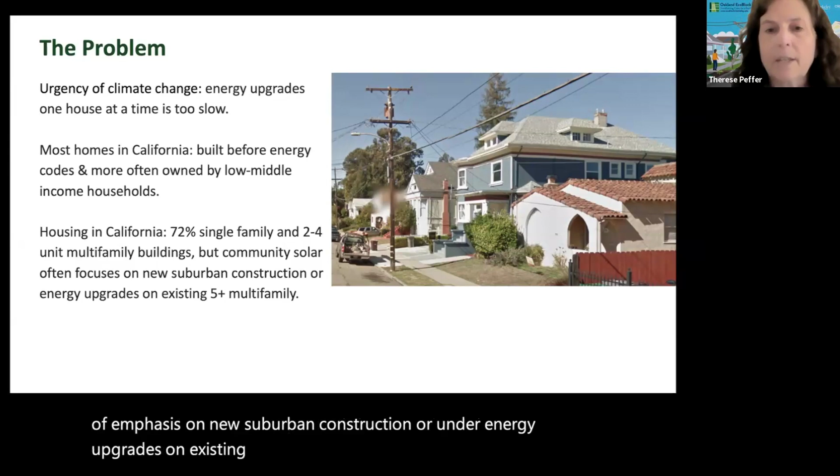Housing in California is predominantly single family and 2 to 4 unit. But at least when we were trying to look for precedents for our project, we saw a lot of emphasis on new suburban construction or energy upgrades on existing multifamily. And so here we felt like, well, this is kind of a sweet spot, really, in a place where we need to focus is existing urban single family homes or low density multifamily.

So the goal was to provide affordable access to solar and energy upgrades, reduce greenhouse gases, improve the electric grid reliability, and to scale, to figure out how we could get more of these happening.

Unique features: we're looking at retrofits of older 1 to 4 unit housing stock, shared rooftop solar, and a potential for EV car share and shared curbside EV charger. That's still not finalized, but I'll talk about that. We designed a microgrid, and I'll talk about our process for that, but we chose not to build it, and I can get into the details of that. We were able to do some stormwater mitigation on the block, and we helped the block create a nonprofit association to share the rooftop solar.

The initial project was funded by the California Energy Commission. We were one of 12 projects as part of the phase 1 feasibility study, where this was: what's your dream? What's the technical, social, economic, financial feasibility of doing some sort of advanced energy community? And we were one of 4 projects that was selected to actually implement our vision back in late 2019.

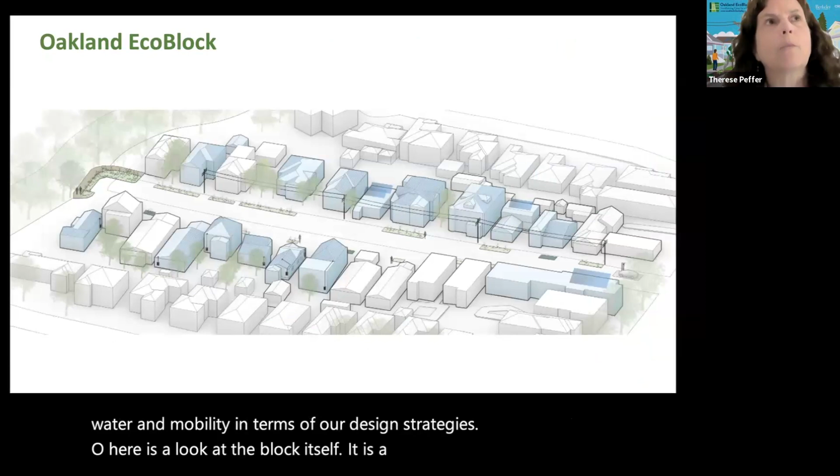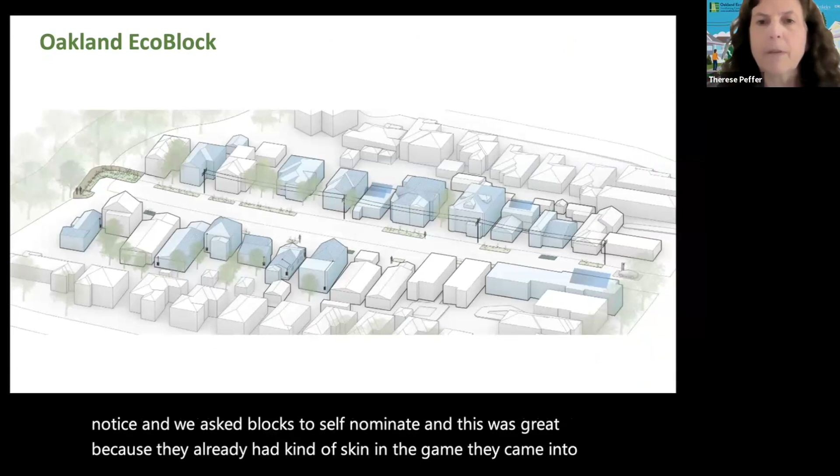One of the first things we did is that we released an opportunity notice, and we asked blocks to self-nominate. This was great because they already had kind of skin in the game. They came into the project at least somewhat organized. They had a leader, and then they were able to recruit folks from the block.

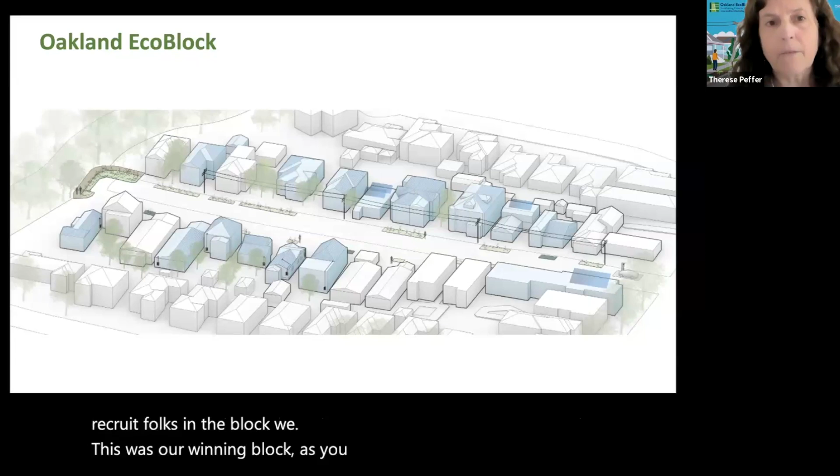This was our winning block, a schematic of the block that was selected through many conversations with the block leadership, with the other top blocks, and with the City of Oakland and PG&E to select this block.

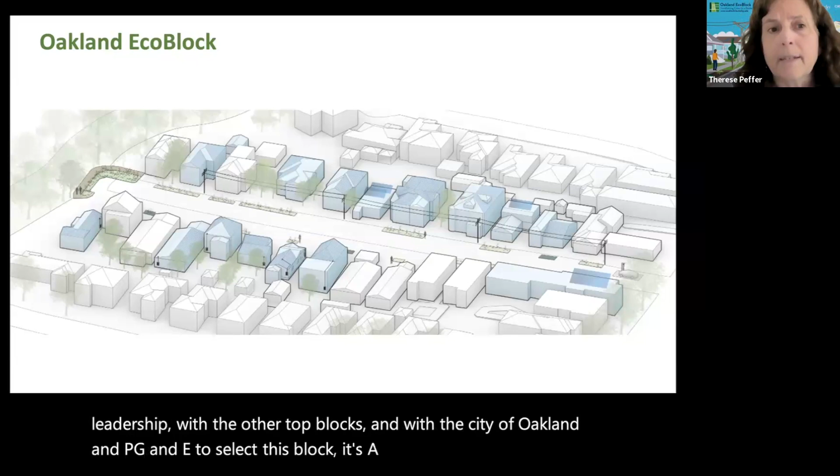It's a cul-de-sac, so it led to some interesting things about the creek at the end there and what we could do with the stormwater on the creek. You can see the houses in blue are the ones that are participating.

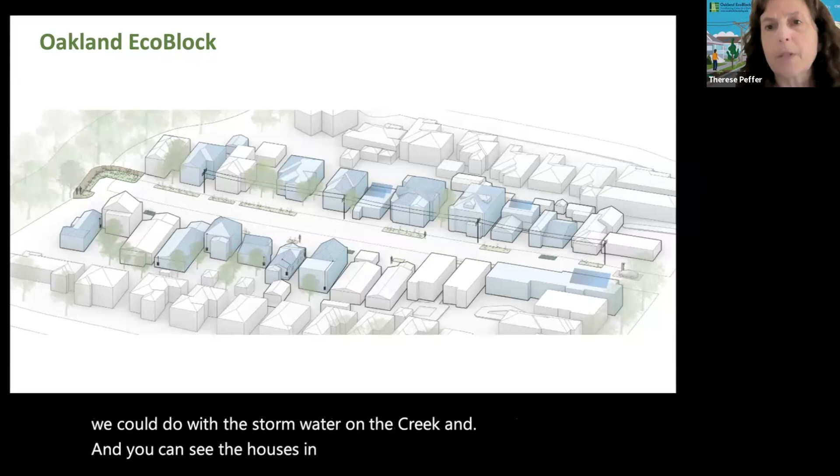Not everyone participated. So of the 24, 25 properties on the block, 15 properties were involved, and that's 25 units.

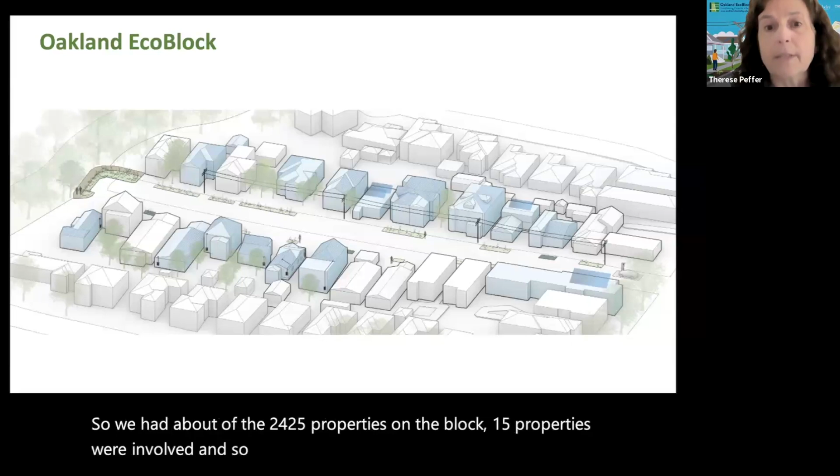Shared rooftop solar, stormwater bioretention, and sidewalk planting up and down the street. And then the innovative legal and governance structures to make this all happen. The idea again was to provide templates. We went through a lot of documents and design, and we want to share those so that it's easier for the next EcoBlock.

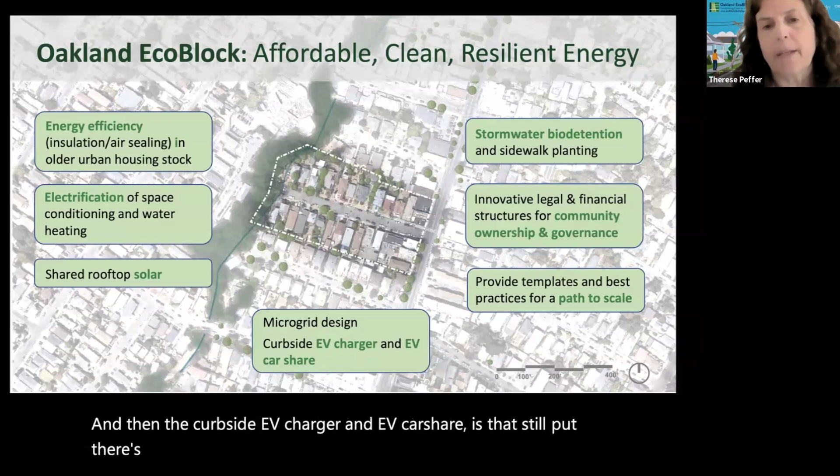We did design the microgrid, I'll talk about that a little bit more in a bit. And then the curbside EV charger and EV car share, there's potential for it, but we're still under a lot of conversations about that.

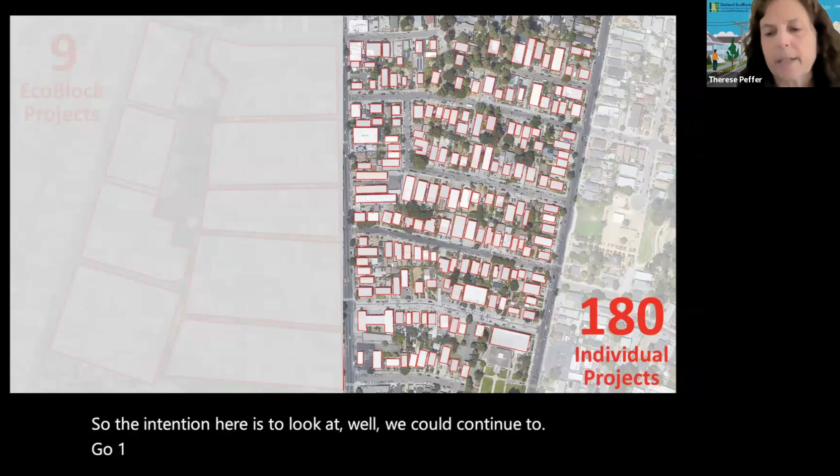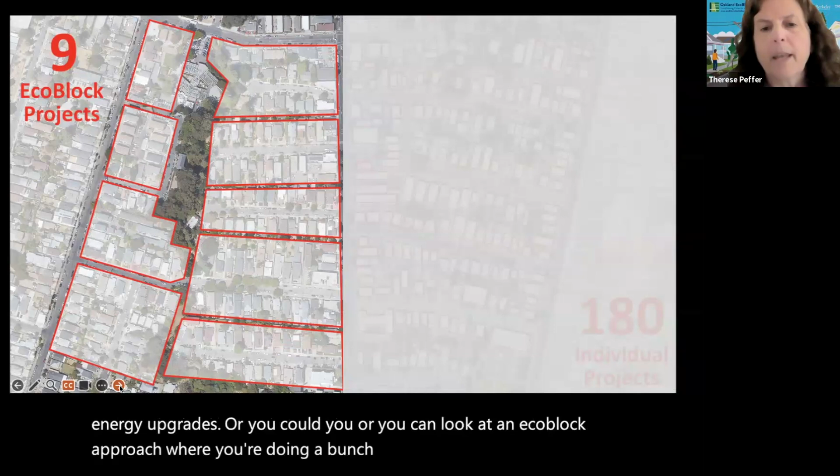So the intention here is to look at, well, we could continue to go one house at a time, one building at a time for electrification and energy upgrades. Or you could look at an EcoBlock approach where you're doing a bunch at a time. And so the intention here is to analyze the economies of scale. What economies of scale can we leverage here?

And clearly you can reduce capacity for solar and storage by sharing. Some people are gone for months, some people are up at night. So if you look at the load itself, there's potential for reducing the capacity of these systems by sharing. Reduce energy transmission losses when you're producing it right there.

Save construction time, I have the next slide talks a little bit more about that. When you can share a car and share an EV charger, then you have fewer vehicles, equipment.

Decommission natural gas lines - maybe you've heard of SB 1221 - a lot of cities have reached out to us saying, wow, how did you get so many people to buy in? And it wasn't 100%, but they're very interested in how you decommission natural gas lines, because anytime there's an earthquake in California, there's always that danger of these natural gas lines exploding, rupturing, causing fires and other safety and health issues. And then finally, this idea of rapidly increasing adopters through the neighbor peer effect.

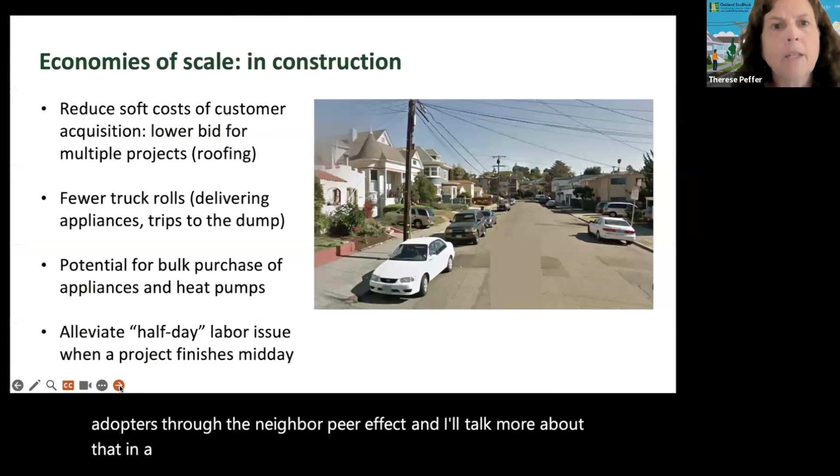I'll talk more about that in a minute. So in terms of economies of scale and construction, one thing that we've seen is reducing the soft costs of customer acquisition. We saw this actually in the project where we had to replace about half of the roofs in order to install solar. And it was much easier to get a lower bid when there were multiple projects involved.

And so we actually saw that achieved on this project. But you can imagine it might be similar for a solar contractor, or home performance contractor, electrification contractor, to be able to aggregate the customers and be able to reduce that soft cost. Fewer truck rolls, delivering appliances or trips to the dump. Potential for bulk purchases of appliance and heat pumps, and we saw that.

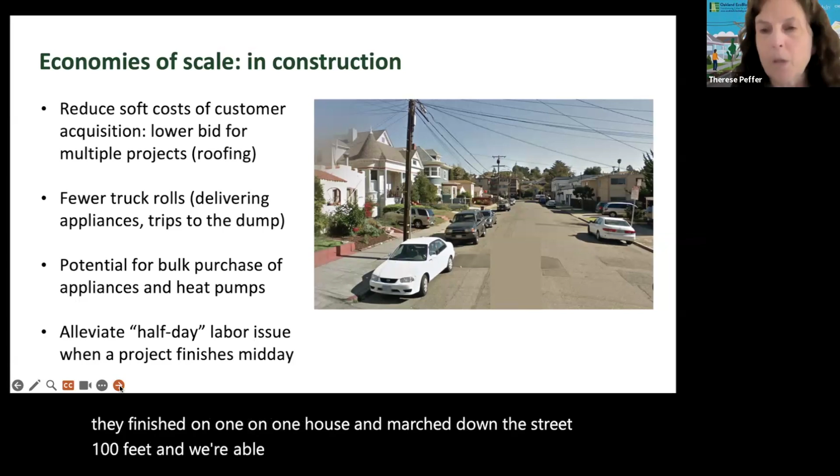A new idea that I had never heard of is alleviate the half-day labor issue. So when a project finishes midday and maybe the next project is 30 miles away, you might send your guys home. In this case, and it happened on this block, they finished on one house and marched down the street 100 feet and were able to bring their equipment over and set up to start the next day.

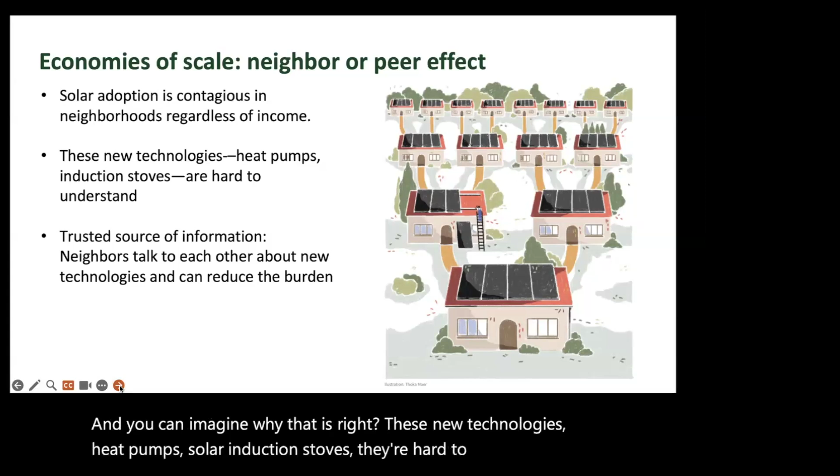These new technologies, heat pumps, solar, induction stoves, they're hard to understand. Whereas solar is very visible, so it's easier for the neighbor to see it and point up at your roof, we still think that this is an important source of information, a trusted source of information for neighbors to talk to each other about these new technologies and reduce the burden of adopting these things.

You can ask things like, how much did that cost? Did you like your contractor? What's the maintenance like? Things like that.

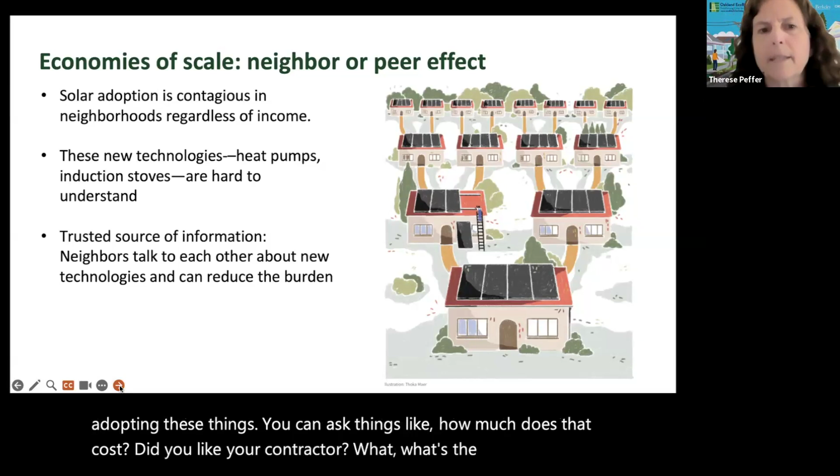So it really starts with the community. We lucked out, this was the community that reached out to us. There were 12 applicants, and this was the winner.

We wanted to really reach them where their concerns were. They want more comfortable homes, improved air quality, keep the lights on, lower the energy bills, local clean neighborhood transportation. So cleaning up the outside air, not just the inside air. And then really helping to strengthen the ties within the community, working together.

So one of the things we asked them to do was join and engage in a homeowners association for 5 years to co-own the solar. One of the things we're doing is testing the calculation of the solar credit with the fees to cover the operation, maintenance, and insurance for this association and for the block.

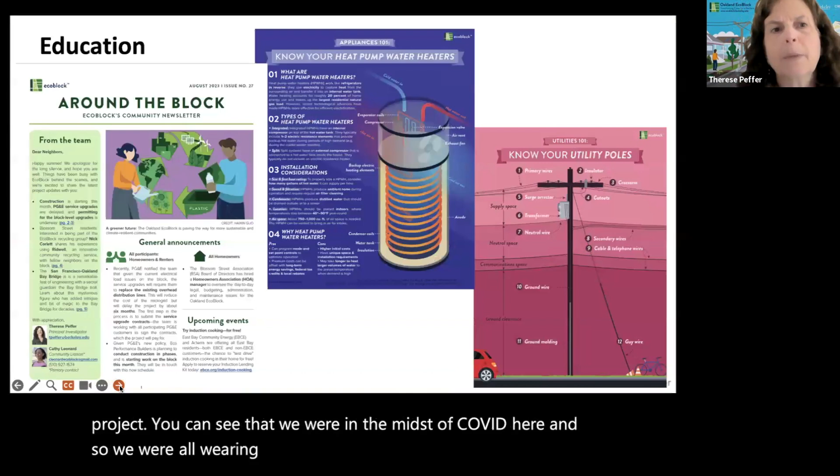I think we had about 10 different meetings on the block where we would go out and talk about different aspects of the project. You can see that we were in the midst of COVID here, so we were all wearing masks. We spent a bit of time creating what used to be a monthly newsletter, then it switched to quarterly, and now it's like twice a year or something. The idea was to really engage with people, to explain some of these concepts and technologies, and to let them get to know us a little bit better.

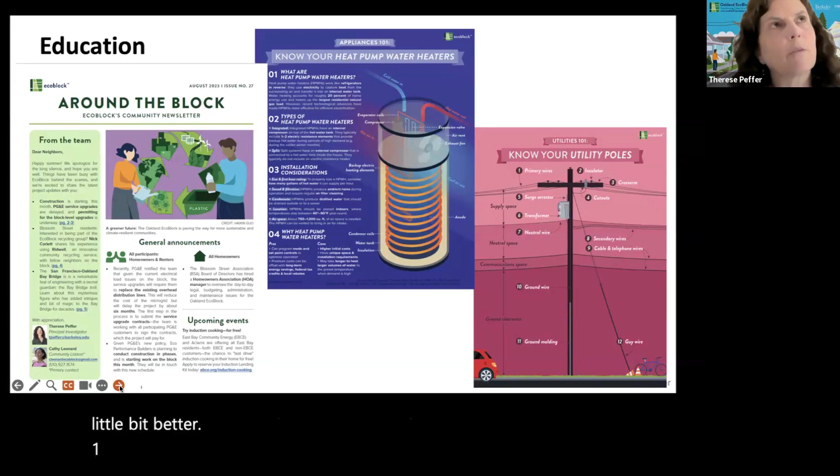One saying that I read or heard recently at a conference was that progress moves at the pace of trust. I think there's a lot of truth to that. It took us a lot of time to build that trust with the community.

So switching now to the microgrid, the idea here was to work with the utility to create a grid that can operate on its own if the power is out, with both a battery and distribution lines. In our case, we have rooftop solar, and we worked with the utility to use their overhead lines.

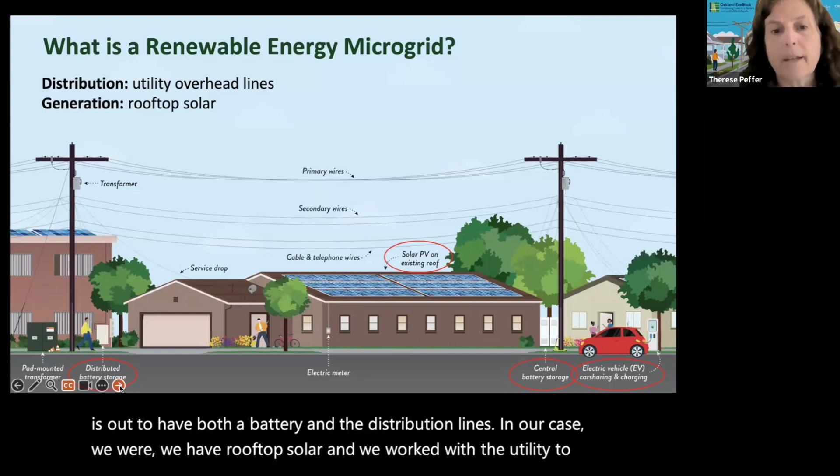Here's another image of that, showing if power goes out in Oakland, the switchgear would open, and this would be an islandable microgrid with solar, a central battery, and grid forming inverter. Not all houses need to participate, so technically their meter or switch would open and they would not benefit by the power. But here are some of the details of what we designed in terms of the size of the battery and 100 kilowatts of solar on the 15 roofs and so forth.

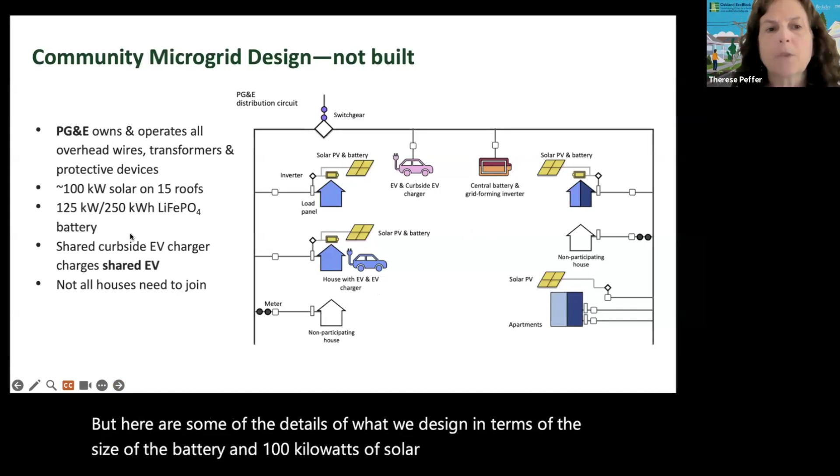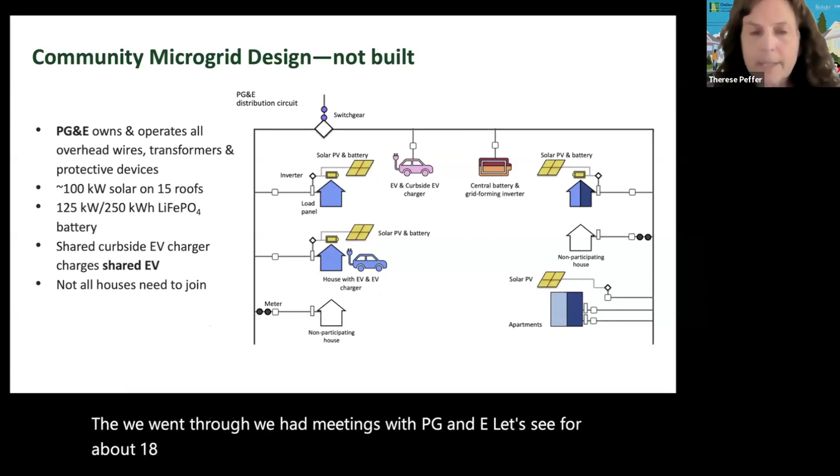We went through, we had meetings with PG&E for about 18 months, every 2 weeks, and we spent a lot of time on the design of it with them. We went through the application process, the wholesale distribution tariff, and worked to become eligible under the CMET tariff, the Community Microgrid Enablement tariff, I think it is.

We went through the design process and figured out all the details, and we figured that it was technically feasible, but because of COVID, inflation, and supply chain issues, it became less and less financially feasible to build this microgrid.

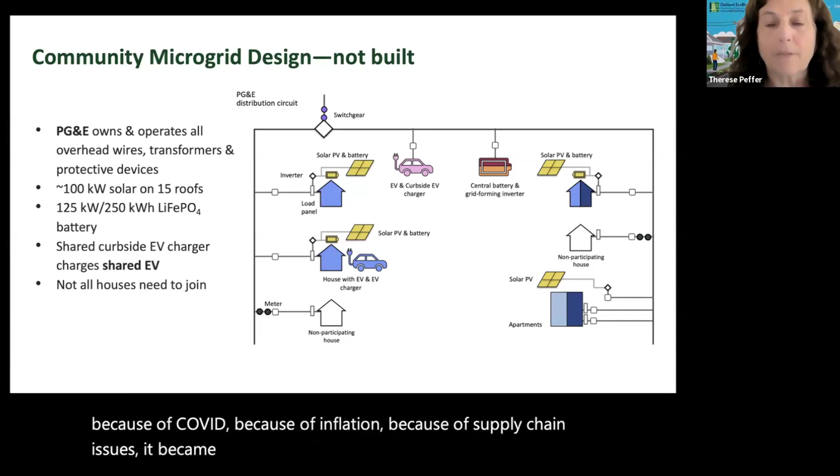And arguably, it was great that we went through it. If we had another 2 million or so, maybe we would have built it just as a research platform, just to kind of kick it through its paces. But this part of Oakland doesn't have too many outages, so it probably would be better to focus on critical facilities or more rural applications.

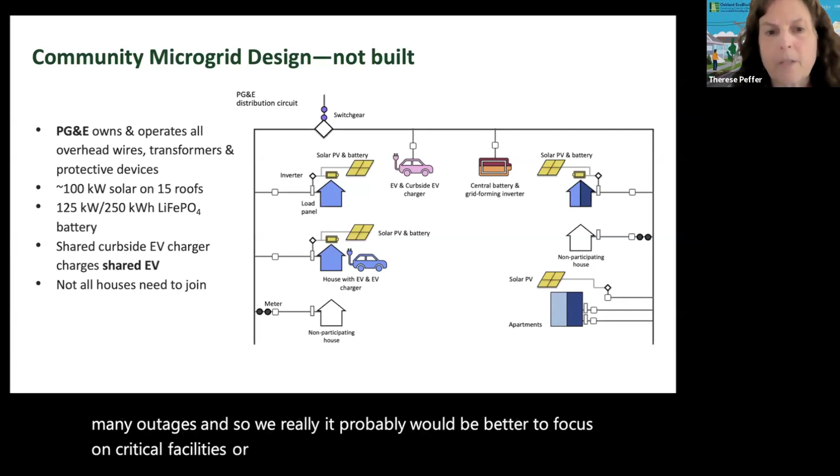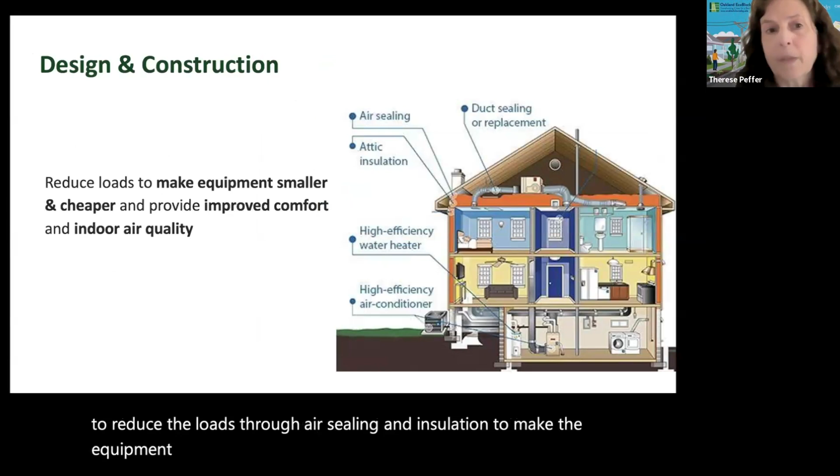The next is just looking at design construction. Obviously, we want to reduce the loads through air sealing and insulation to make the equipment smaller and cheaper. So that's one of the things we did. Our focus is attic and floor insulation and air sealing. We did not insulate walls just because of the cost.

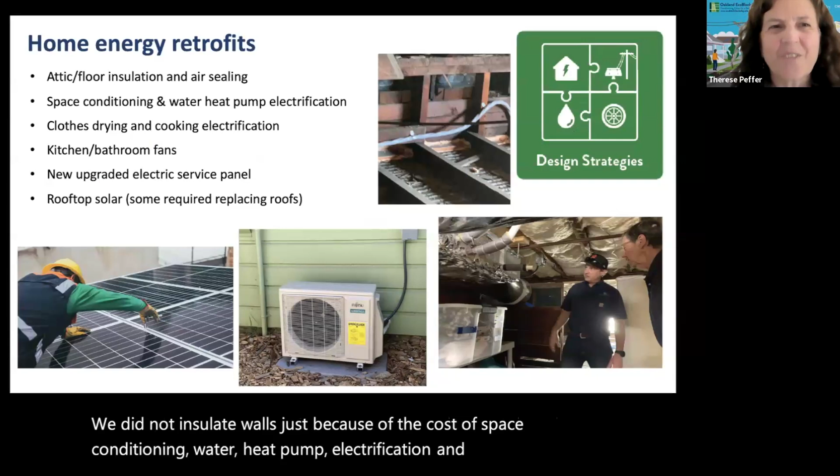Space conditioning, water heat pump, electrification - jury's still out on the clothes drying and cooking, but we are hopeful that will happen, and we should know in the next few weeks. Kitchen and bathroom fans - a lot of these homes did not have functioning fans, so that's something we really needed to look at. We did upgrade the electric service panel for all of them, and if we were to do this again, we may not. That would be something we'd look at again.

And then rooftop solar - and like I said, about half of them required replacing the roof.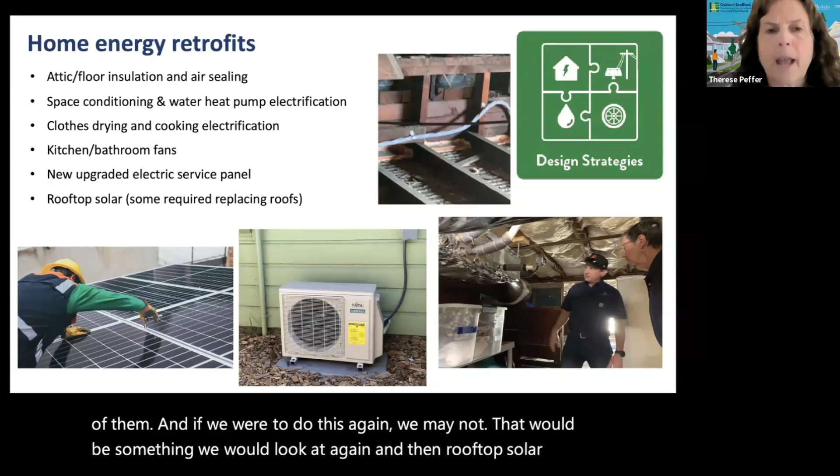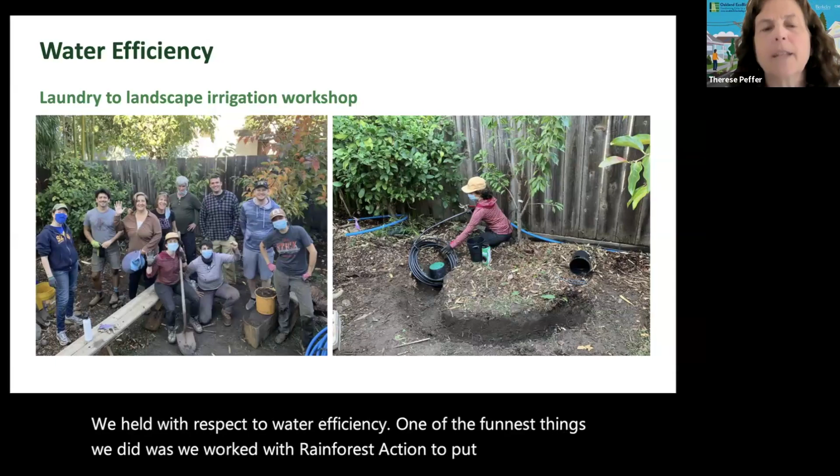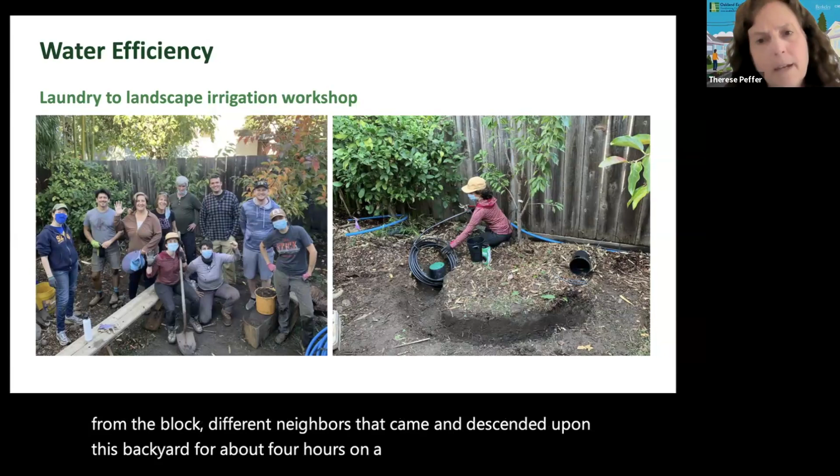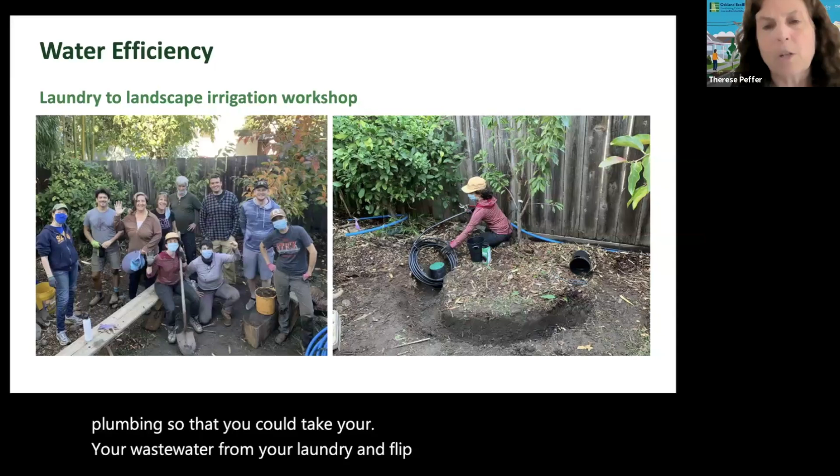With respect to water efficiency, one of the funnest things we did was work with Greywater Action to put on this laundry-to-landscape irrigation workshop. About 8 people from the block, different neighbors, came and descended upon this backyard for about 4 hours on a Saturday and dug trenches throughout the backyard - you can see one there on the right going around the trees. We had a group inside working on the plumbing so you could take your wastewater from your laundry, flip a lever, and the water would go to your backyard and water your trees. It was a really fun way to build community too.

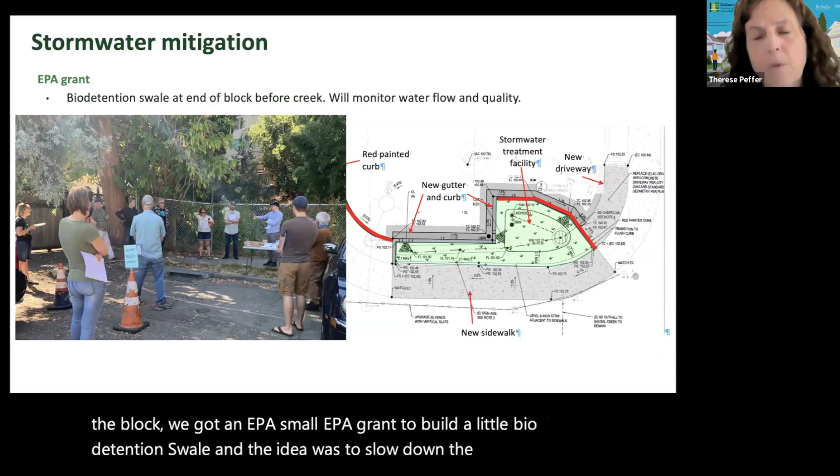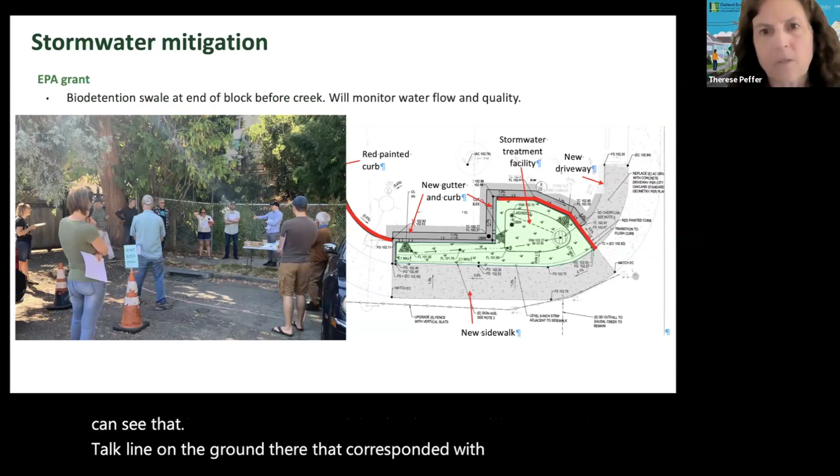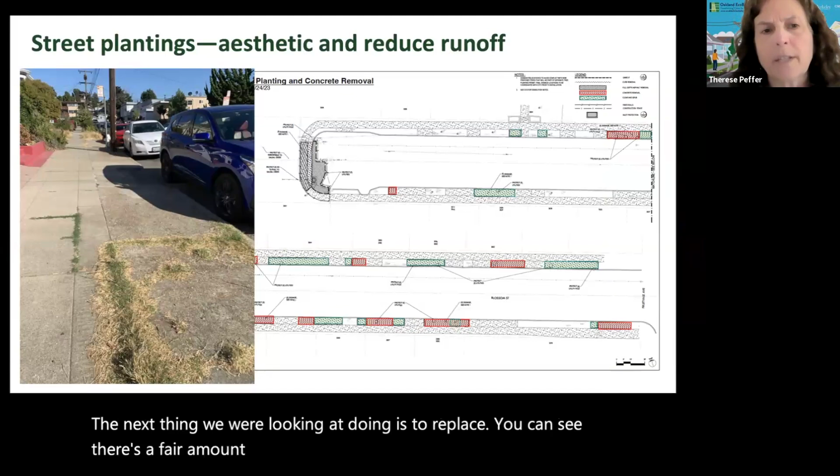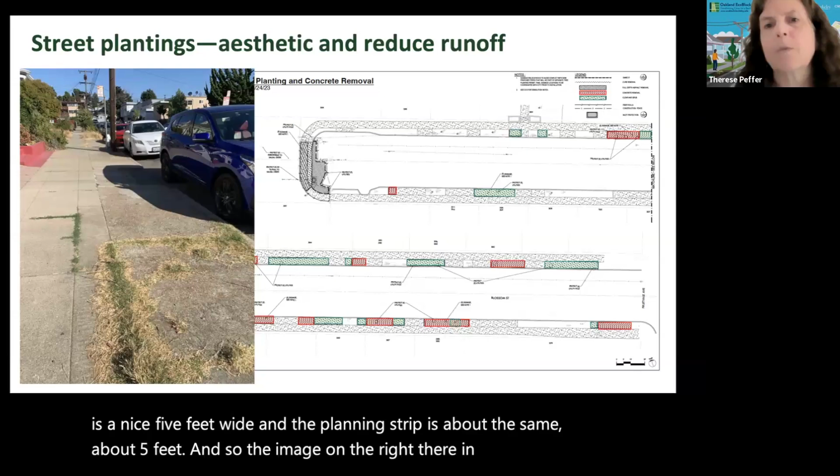We were very interested in adding a car share for the block. In fact, when we first surveyed people on the block, a majority, like 60-some percent, said they would get rid of a second car if they had access to car share right there on the block. But what we found is that it was really difficult to find a car share company that would work with a private group. The intention was to have a car share only available to this block, which is more difficult to do. We went through a couple of companies.

The city of Oakland requires a major encroachment permit - places like Berkeley only require a minor permit, which would have been nice. The city would not let us paint or enforce an EV-vehicle-only spot, so that's why this is a little bit up in the air. There's interest from the community, but a lot of concerns about how this would actually work - what if you couldn't park at the curbside charger? A couple of neighbors did stand up and say they could park in our driveway if needed. So this is still under investigation.

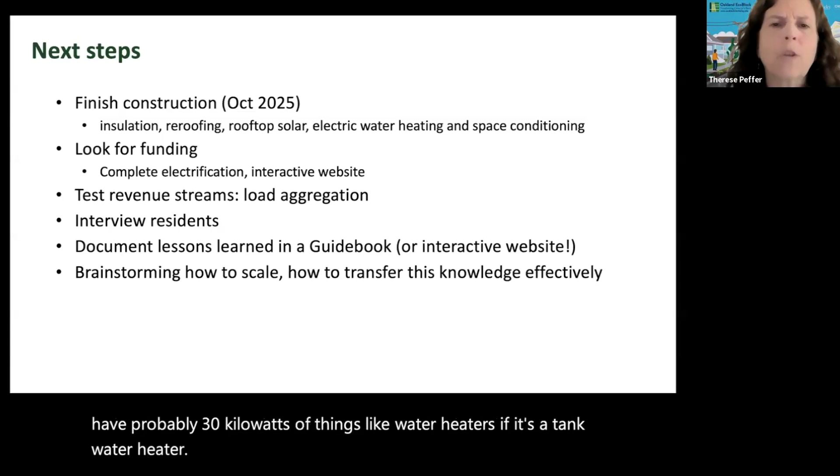And here we have probably 30 kilowatts of things like water heaters. If it's a tank water heater, we think we can control it in a way where we can provide some services to the grid, but still accommodate people's choices in terms of how they use their water.

So we'll be kicking the tires for the next year, making sure everything is installed and working well, interviewing the residents, asking how this process went, other than it's been really, really long, Therese, which I know I'll hear a lot about.

And then the idea is to document our lessons learned. We're working on that right now on our website, so that'll be rolling out over the next 6 months or so, and continuing to brainstorm how to scale and transfer this knowledge effectively.

We've conducted quite a bit of outreach at places like ACEEE Summer Study for Energy Efficiency in Buildings, American Institute of Architects, Greenbuild, and other places. We've given a couple of tours.

We had Laura Klivans of KQED do this wonderful podcast where she interviewed folks on the block, released about a year and a half ago, rebroadcast back in a year ago in February. There will be another 8-minute segment on All Things Considered in June, so we're really excited about that. And our website's still getting a lot of interest from folks.

A lot of lessons learned—we worked with PG&E to design the microgrid. It's technically possible, so we can talk about that more if people are interested.

The battery shed—when you deal with a battery, like a commercial battery, in a very tight urban environment, it had to have noise mitigation, and it had to have an air conditioning system for the battery. So it ended up being pretty expensive, which is unfortunate.